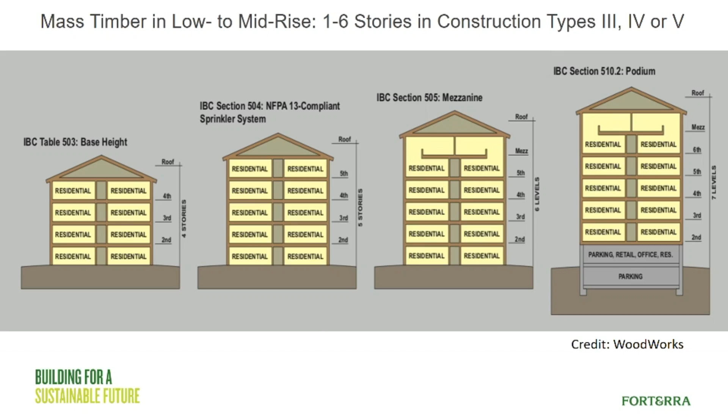And so here's where we came from. We sent some reverse trade missions over to Europe. They saw all these tall wood buildings. They came back and they're like, why can't we do this out of mass timber? And light frame, specifically in Seattle since the 90s, has had 5/2. So you could do 7 stories of light frame construction, where the building code will limit you to 6 stories out of mass timber. And mass timber is more wood fiber, costs more money. So why would you build a mass timber building when you can go 7 stories with light frame that's less expensive? Didn't make sense.

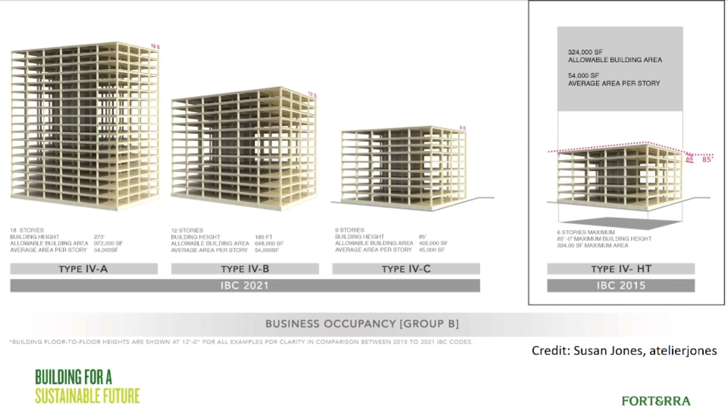So again, on this committee, basically we took these prototype buildings, and they developed nationwide language on it through the ICC committee that was comprised of the steel industry, the concrete industry, and the wood industry. So again, there are some hiccups in here, as the concrete industry fought tooth and nail to limit this. So this originally was going to try and be 9 stories, 96 feet, but they capped us at 85. But they let us have the 9 stories. So there are things in there that don't jive, but it is what it is. And then we didn't touch the traditional type 4 heavy timber that could do the 6 stories. We literally just introduced 3 new construction types.

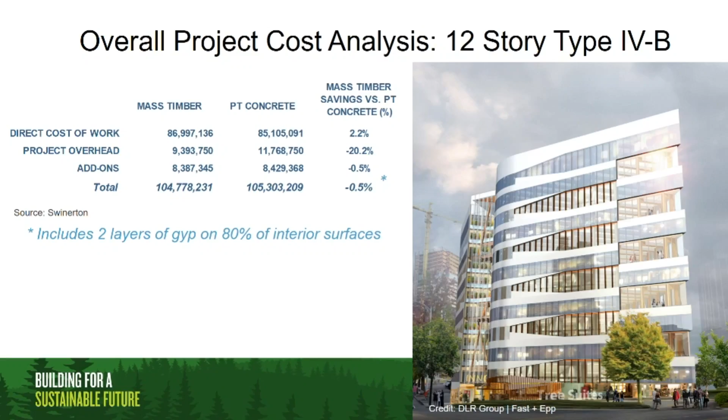And if you've not seen it, Matthias is here, DLR Group. We wrote a book with DLR Group and Fast + Epp and Swinerton. And basically, I will tell people that we actually looked at this building and we did things that you wouldn't try and do in a traditional square wood product building. So this has a nice S shape on the front of it. It's got the 2-story atrium. It's got a green roof on it and everything, and still priced out 0.5% less than a post-tension concrete building. So again, we did things that were not friendly to wood to make it not pencil, and it still did pencil out. And so this is an example of a project in downtown Seattle, right on Denny Park there.

And there's quite a few more popping up. So even though this isn't happening right now, because the developer's waiting till the next economic cycle, we have 3 already in for permit in this realm.

And so with that, we have speakers today on this panel to go through the practical considerations, like what have we run into here. Troy is going to speak on the JTM construction side of things and what they're seeing. Chris Patano is going to speak on Patano Studio. He's done a lot of work in the mass timber arena, and has built a DLT building in South Lake Union. Dean Lewis is with DCI, is that what we're saying today? DCI Engineers, and he's going to talk about some of the engineering work that's gone on.

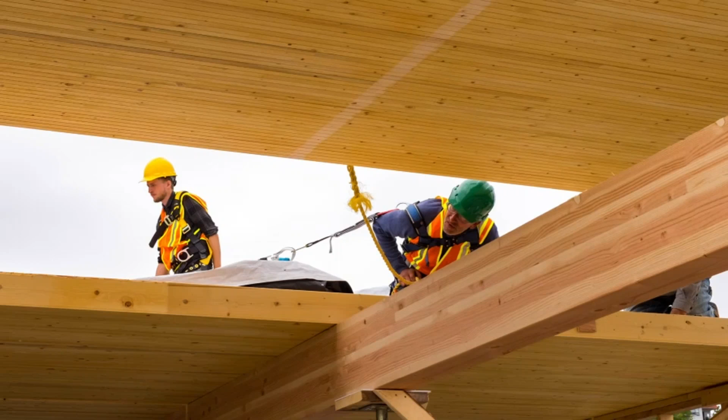We have a few images of the installation. We wanted to make this a little more difficult, so we decided to do it over water with a barge, just to see how that would go. So we shipped the DLT panels down from StructureCraft. We staged them on North Lake Union, hired a barge company, brought them over. Once we got the barge and the crane aligned, we picked the first panel.

The first panel took about an hour and a half to set because, of course, it was 8 feet wide and 38 feet long. But once we got that set and square, the rest of the panels went in about 3.5 to 4 hours. So what we had blocked out 2 days for, we got the first panel in about 10:30 in the morning, and we were done by 2 in the afternoon. So that was a great surprise and relief.

The building code official from the city of Seattle had blocked out 2 days because they were very interested to see how this went together, and we all looked at each other at 2 and we're like, well, what should we go do? Because that's done. So it speaks to the modularity. It speaks to the precision of the materials that are delivered. And with a good install crew, the speed that can be accomplished in construction.

And Ethan and I were in a meeting yesterday, and when you start penciling out and working on larger projects, the speed and the schedule reductions are really in our favor for mass timber projects.

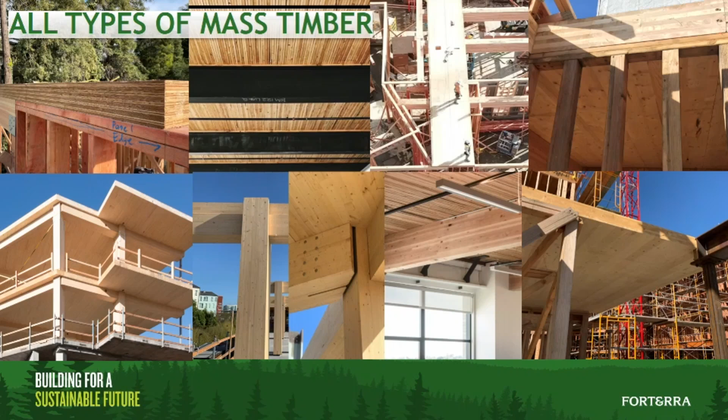I'm Dean Lewis with DCI Engineers. We are structural consultants. The one thing I'll say for DCI is we have about 13 offices across the U.S., mostly in the West Coast, and then a couple in the Midwest, in Austin, Texas, and Denver. And what I can say is from all those offices in the past couple of years, we've seen a major influx in the amount of mass timber projects that we have.

We have about 60 projects currently in design or construction, and that's using all different types of mass timber. That's the CLT, NLT, DLT, and even the new player MPP. And so it's been quite the awakening for us and realizing the potential in all those different markets. They have different supply chain considerations and a lot of different cities having jurisdictions with their own interpretations of the code. Beyond DCI, you can obviously see, and Ethan's talked about the wave that's coming across the nation.

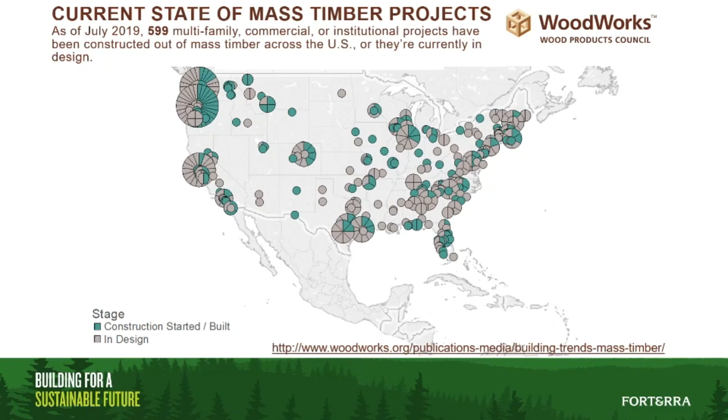And there's still some challenges for us, but it wasn't as bad as 4 or 5 years ago. I recall trying to get into the city and having a building that used CLT. There were some jurisdictions that were very standoffish, especially in California, Washington, Oregon, more progressive. But I remember when Structurlam came out with their first ICC report, that was getting passed all around because no one had one yet.

And now we've come a long ways in terms of structural testing and fire testing to the point where we're not really operating at a disadvantage anymore. And soon, with these new codes, going to be operating at an advantage. And what I mean by that is the structural impacts. So currently, for our codes here in Seattle or Washington and Oregon, we're designing under a lower seismic force.

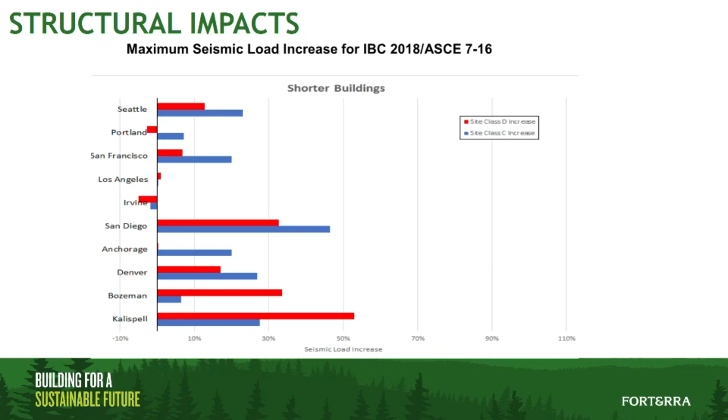Essentially, what has happened is the United States Geological Survey has gone out for the past few years and collected data. And from that data from seismic activity, they've determined that our probability of exceedance, of which we design a building for to make sure that it's safe, has been not as significant as it needs to be. So therefore, come July, in Portland and Seattle, and this is actually already hit in California, so we're already seeing this, you're gonna have to design for higher seismic forces.

It gets even more significant if you look at taller structures. So we're talking now the 12 and 18-story structures. You're looking at anywhere from a 60 to 80% increase in your seismic forces. And so that's going to give mass timber a huge advantage moving in the future. Instead of what we were looking at 4 or 5 years ago, where we didn't have the testing to back this up, we didn't have the product development. Now we have suppliers in the state.

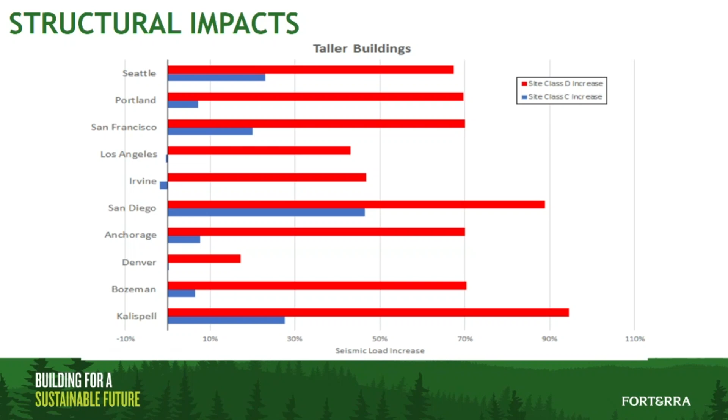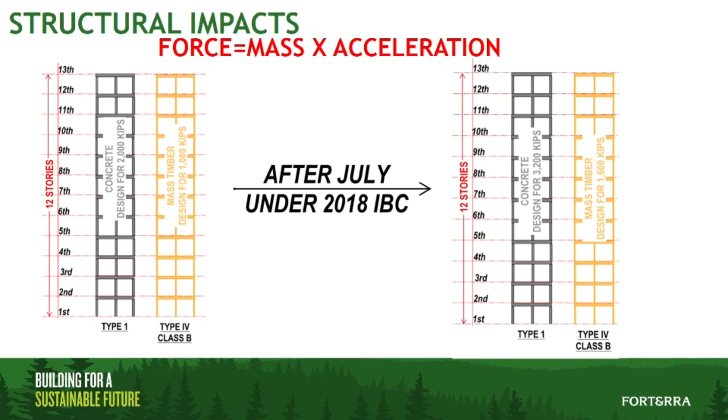So looking at an example, it's pretty simple. Force equals mass times acceleration. The mass of the building, that's whatever steel, concrete, timber. That acceleration is the seismic event, put hypothetically, and so therefore the force that we have to design for is much greater. So where Ethan showed off that 12-story building, which is an amazing cost study, and it was penciling out pretty much even, now we might be pushing the needle a little bit more towards a mass timber building.

And there's other challenges there with CLT shear walls that are considered for certain building types or CLT diaphragms, which we can talk about later.

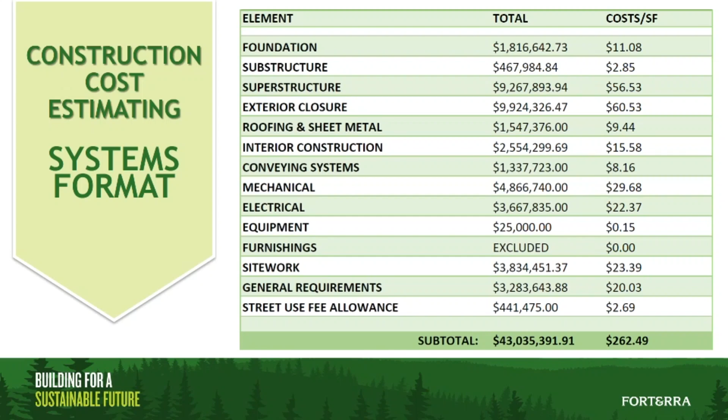So this is a snapshot of a commercial project. It's about a 10-story building that we're working on in Seattle, just to give you some perspective. It's core and shell office. We don't have time today to go into all of the different types, high-rise, residential, that kind of thing. But pretty much all the work we do is in the downtown corridor, either Seattle or Bellevue, as it relates to high-rise and so forth.

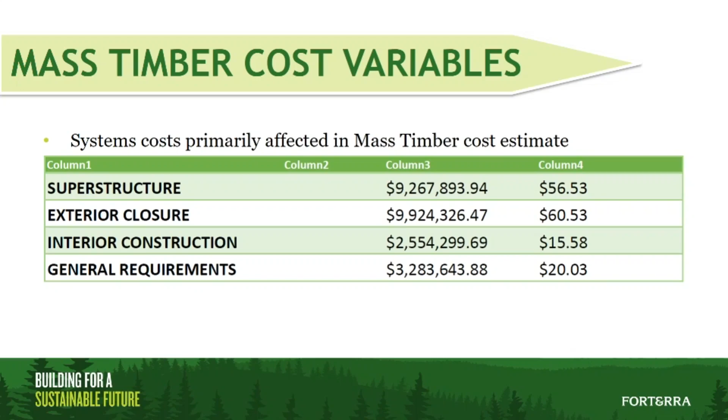So when we analyze mass timber, the systems that are primarily affected are the superstructure, and that's where you get into that general concrete, steel, mass timber discussion. Exterior closure, how the building is enclosed, and then how the interior is built out, and then there's what we call general requirements that go with it. The general requirements are those things that cost money that I often say owners never like to pay for, but it's the cranes and the temporary protection and things like that to support the cost of construction.

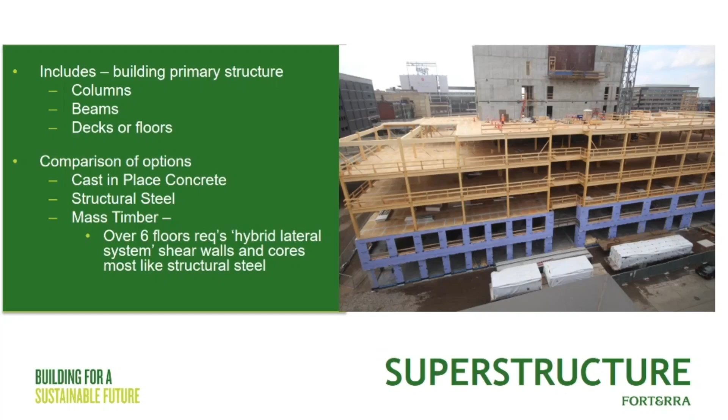The superstructure, this is a good picture. Superstructure is the columns, the beams, the decks, and the floors. When we study these buildings, we've looked at them in comparison to cast-in-place concrete and steel, as you heard Ethan talk about. Those are the traditional ones. If you're going to build a high-rise, the go-to system has always been concrete and steel. I guess the change in that is the recent code revisions and a couple other things I'm going to talk about. But with mass timber, it's interesting, when you get over about 6 floors, the feedback we're getting is that we're now looking at a hybrid lateral system. So the wood systems now need support from a lateral shear wall or brace frame or something like that.

And this is an older slide, so sorry, but lateral systems would be like your concrete core, concrete shear wall, steel brace frame, something like that. So when we analyze them, we have to pre-plan them and price them out with both of those systems configured. And I think from just a dumb general contractor's perspective, mass timber is a lot like steel. It's pieces and parts and connections and details like that. So it tends to get pre-planned and coordinated in that vein.

The enclosure is just everything that encloses the building. There's a lot of different options. So when we're analyzing mass timber, there's really no reason that there should be a cost premium or necessarily a cost efficiency with an exterior closure. They coordinate very well with the mass timber building. I think the main consideration, our takeaway, is that there are some constructability sequencing issues that are important as it relates to bringing the building up together so that you can manage weather and keep the building dry as you build it.

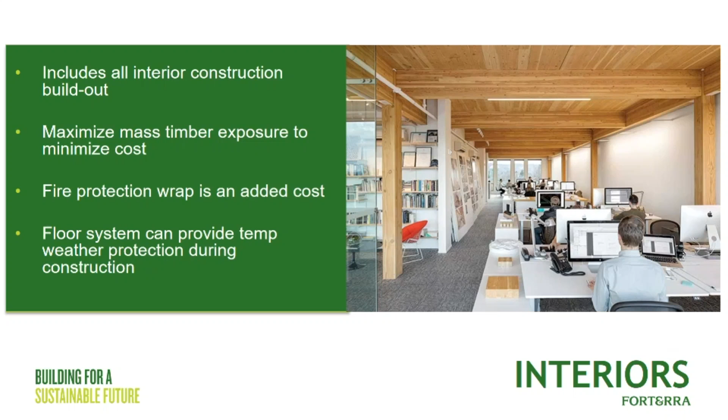The mass timber is the structure, that's what you're dealing with, and so that drives you into wanting to think about pre-planning where you route the systems and how you prefabricate those kinds of elements into the glulam beams and the CLT panels. So that leads us, in high-rise, and this is a nice parallel with mass timber design, to really maximize virtual design and construction, because you're looking at an integrated approach to how we pre-plan these projects.

If we're going to erect a panel, we have to route a pipe through it. We want to have that drilled or prepped or whatever off-site, so it shows up on site and we can just erect it and move on.

Sourcing has been an issue, but I think what I'm seeing is that there's 4, 5, or 6, depending on the timing of your project, regional suppliers. And so that's a game changer, I think, for commercial construction, is that we can go out and talk to 3, 4, or 5 suppliers about the timing of our project, the cost, and options.

What I've found when talking to them is they're all a little different in terms of how they do their offerings and the types of products they make and their ability to do certain levels of prefabrication or off-site storage and things like that. And because we're working kind of in downtown sites, everything is what we call just-in-time delivery.

So whatever this mass timber is, it's got to show up on the truck, get erected, and then bolted into place. And it has to be good to go kind of at that point, just because we're picking 70, 100 items a day. So we really maximize the off-site prefabrication, which also lends itself really well with the virtual design and construction.

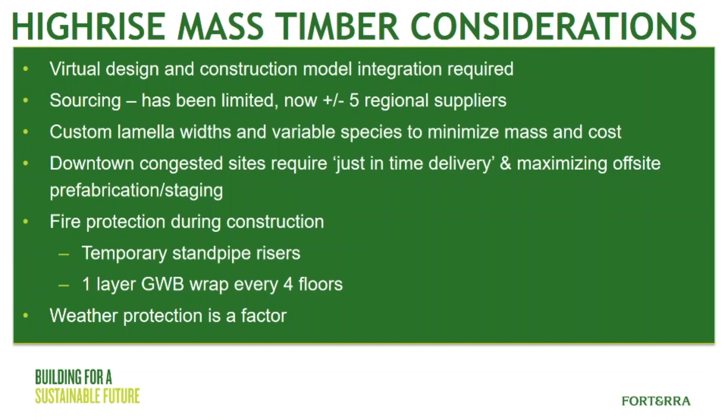Fire protection during construction is an issue with high-rises in general. In any high-rise, you have to provide temporary water for fire in the event of a fire to fight it. There's a code requirement with the mass timber that we need to wrap the underside of every 4th floor during construction. So if you wrap it with GWB, it's water sensitive, so we need to have a game plan for keeping that dry as you work your way up through the building. So weather protection is a factor as you consider this.

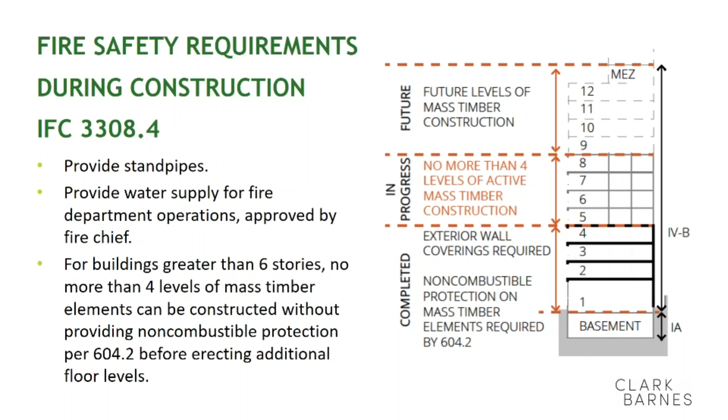Ethan and I have talked about this. It's not a particularly new idea in high-rises. We do this, we call it bathtub construction as an example. You've all seen 40-story buildings go up, and we do temporary protection for very similar reasons, but for weather protection. So we'll have a concrete floor, we'll bathtub it to the exterior closure, run pipes up so water can collect there and we can pump it out, but it keeps the floors below dry.

An application or a means and method similar to that would be something we'd probably look at to solve this kind of a problem, to keep the drywall dry and keep the interior of the building as you go. But what it does tell you is what I call supply chain management. You have to really do a highly thorough job of coordinating this work so everything shows up when it needs to show up. Because if we're wanting to bathtub the fifth floor, we've got to make sure that the exterior closure's there and in place, that we've got the floor materials down to do that, and that's going to connotate a highly regulated construction schedule.

There you go. All right.

So we came up with a set of pre-planned questions to get this going, and then we'll open up to the audience with questions that you might have. So the first question is actually for Chris. We kind of want to do the architect, engineer, contractor concept here. So Chris Patano, architecture side of things, how does the mass timber material affect your design intent?